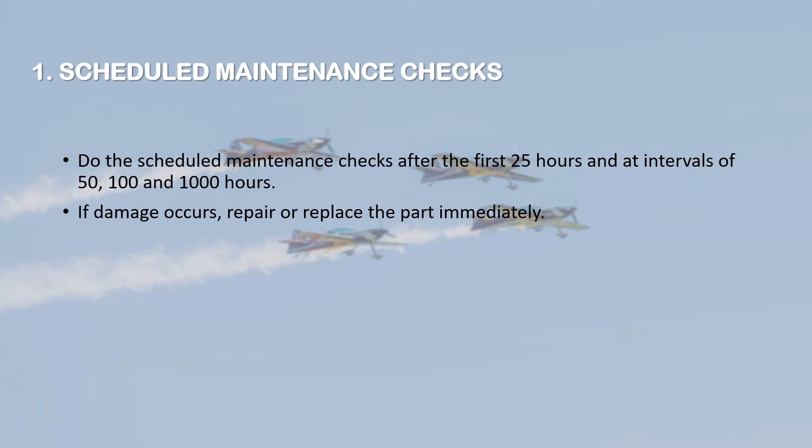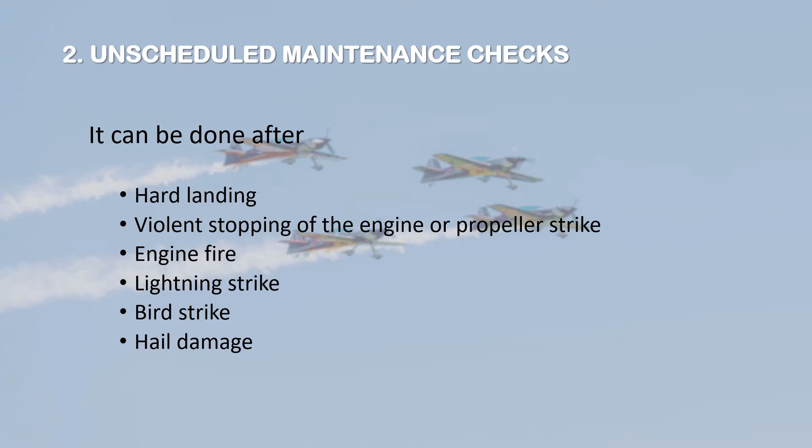For the control, operation, and maintenance of the propeller, there is the MT propeller operation and installation manual 124, which is referred to by me in giving this presentation.

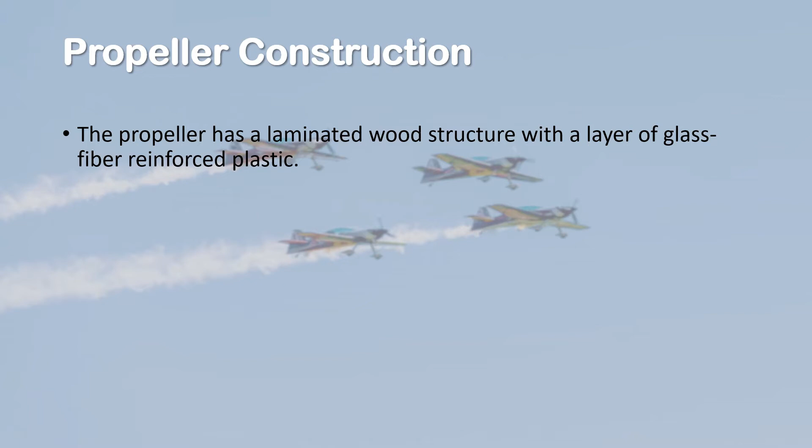Before starting with the maintenance, let's first look at the basic construction and operation of the propeller. The propeller has a laminated wood structure with a layer of glass fiber reinforced plastic. Some parts of the leading edge have metal tips to prevent erosion. Paint is applied to the propeller as protection from the environment.

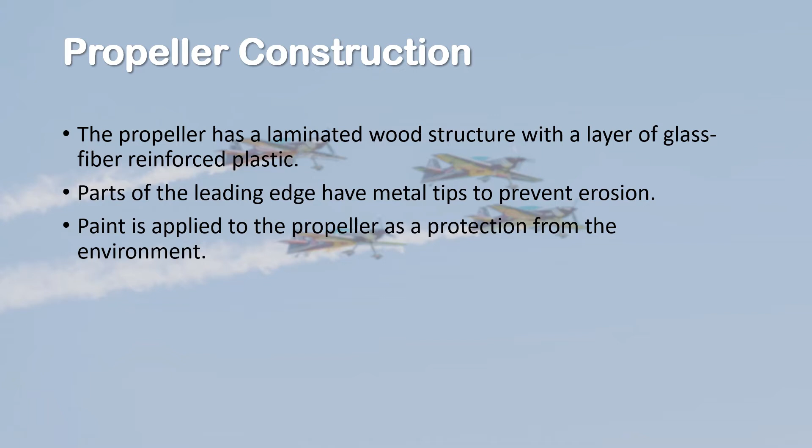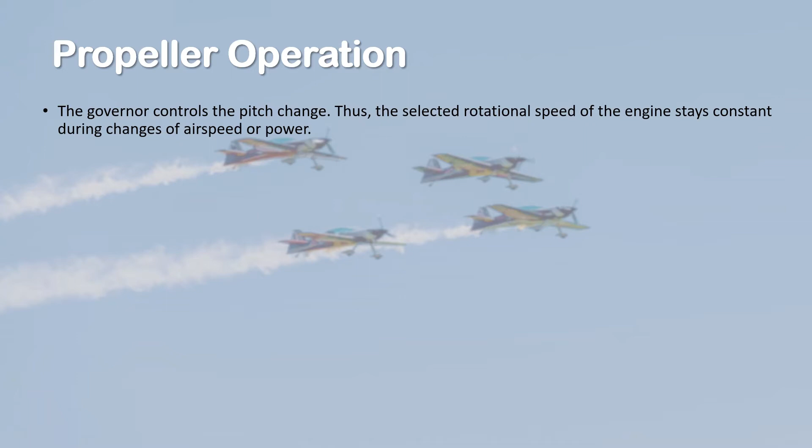Now coming onto the operation of the propeller, the governor controls the pitch change, thus the selected rotational speed of the engine stays constant during changes of airspeed or power. The governor must allow a constant speed. On takeoff, static RPM should be approximately 50 to 100 RPM lower than the max RPM, and the propeller must limit this RPM. If the governor limits this RPM, it must be readjusted.

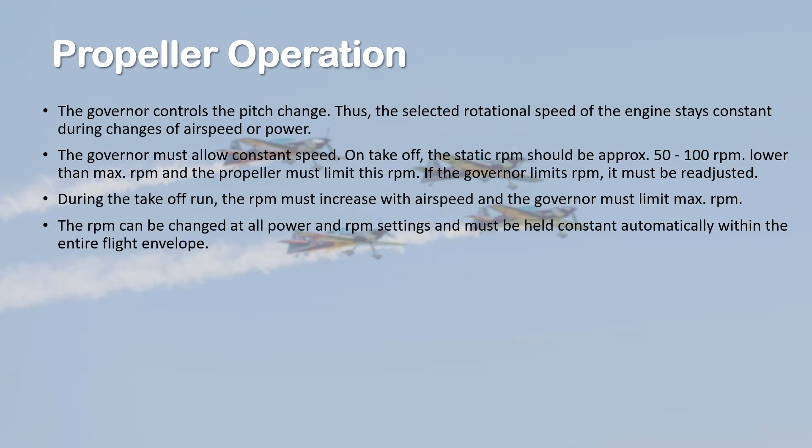During the takeoff run, the RPM must increase with airspeed and the governor must limit the max RPM. The RPM can be changed at all power settings, and RPM must be held constant automatically within the entire flight envelope. Mechanical stops are available for low and high pitch.

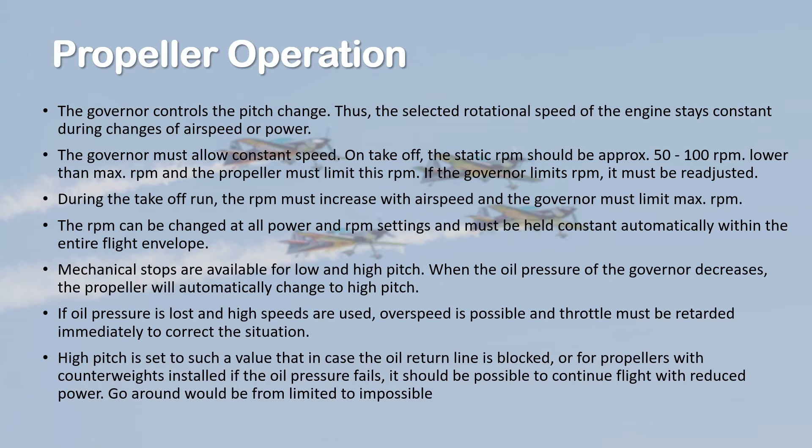When the oil pressure of the governor decreases, the propeller will automatically change to high pitch. If oil pressure is lost and high speeds are used, overspeed is possible and the throttle must be retarded immediately to correct the situation. High pitch is set to such a value that, in case the oil return line is blocked, or for a propeller with a counterweight installed if the oil pressure fails, it should be possible to continue the flight with reduced power. Go around would be limited to impossible.

Now let's start with the maintenance of the propeller. There is no special schedule made for the maintenance of the propeller, although the propeller maintenance can be done after a usual inspection. Let's first start with maintenance of the surface of the propeller.

For repair of minor damage in the blade surface and edges, automotive materials such as PU or acrylic paint and epoxy resin can be used. The blade can be cleaned with normal car cleaners and polish. It is important to avoid moisture penetrating into the wooden core.

If necessary, please consult with an aircraft inspector for final decision concerning repair. If the repair is made locally, please observe the curing time of the resin and paint system.

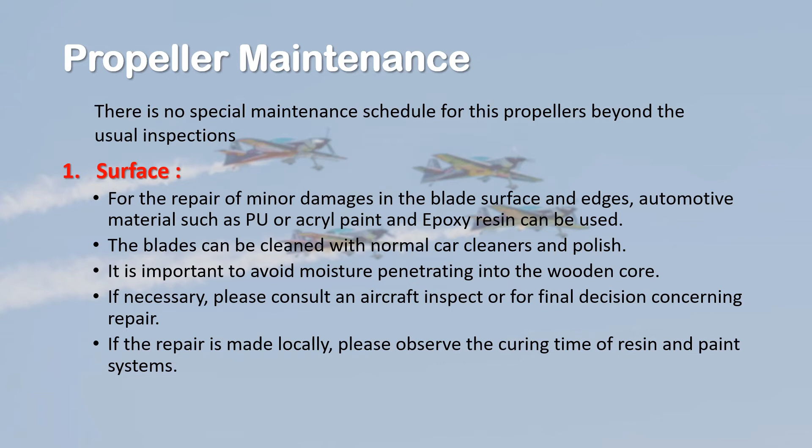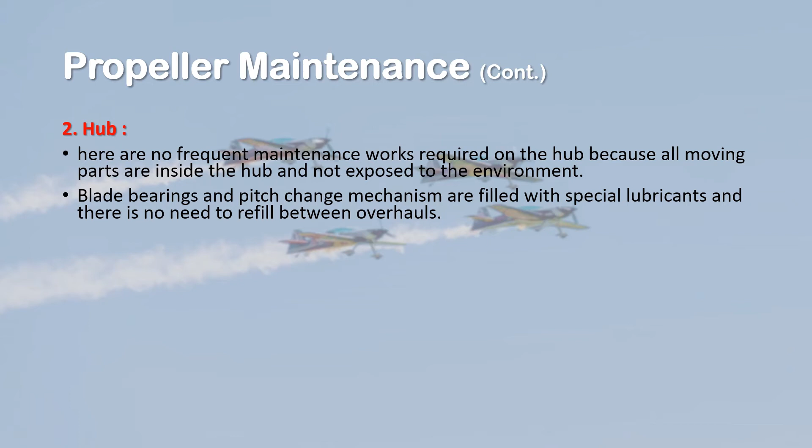For the hub, no frequent maintenance work is required because all the moving parts are inside the hub and are not exposed to the environment. The blade bearing and pitch change mechanism are filled with special lubricants, and there is no need to refill in between overhauls. Corrosion protection of the hub with thinned engine oil or anti-corrosion spray is recommended.

For the spinner, repair of a spinner part is not permissible. Cracked spinner domes or filler plates and backplates are to be replaced with airworthy parts.

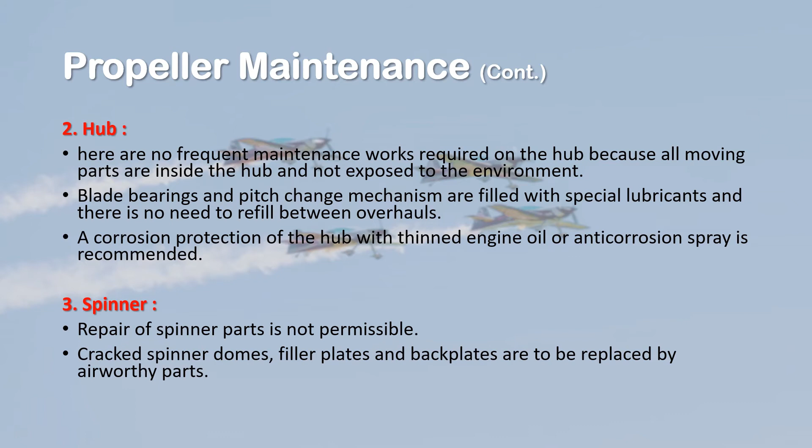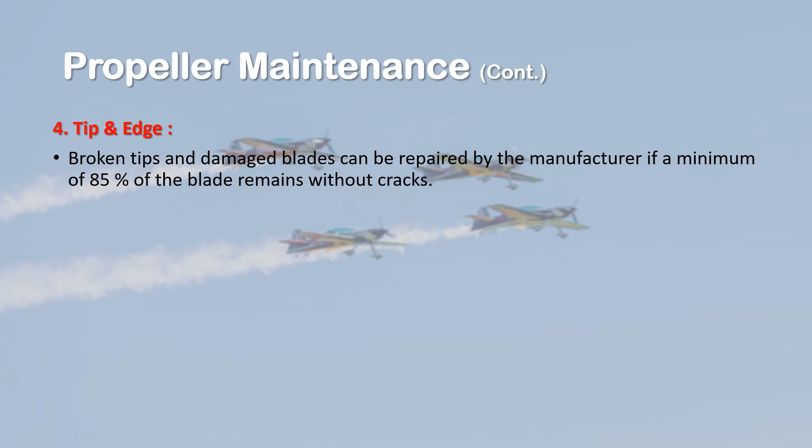For the tip and edge, broken tips and damaged blades can be repaired by the manufacturer if a minimum of 85% of blade remains without cracks. Damage of the trailing edge can be repaired because the epoxy cover can be replaced and a new erosion sheet can be installed. Blades can be replaced individually or as a set.

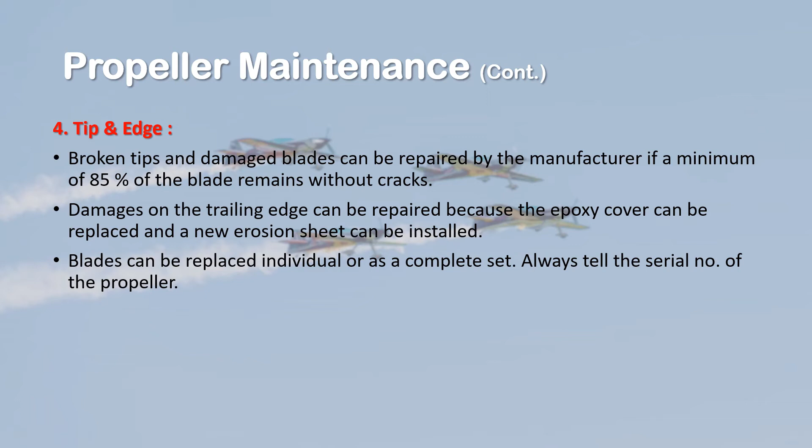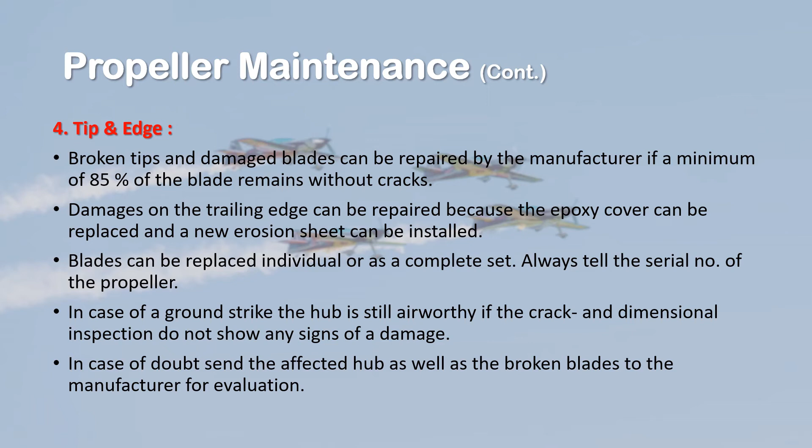With a serial number, in case of ground strike, the hub is still airworthy if the crack and dimensional inspection do not show any sign of damage. In case of doubt, send the affected hub as well as the broken blade to the manufacturer for evaluation.

For a dynamic balance, let's first look at the overview of the dynamic balance. Dynamic balance is accomplished by the accurate means of measuring the amount of load and location of the dynamic imbalance. After such undertaking, the remaining imbalance should be below 0.2 IPS.

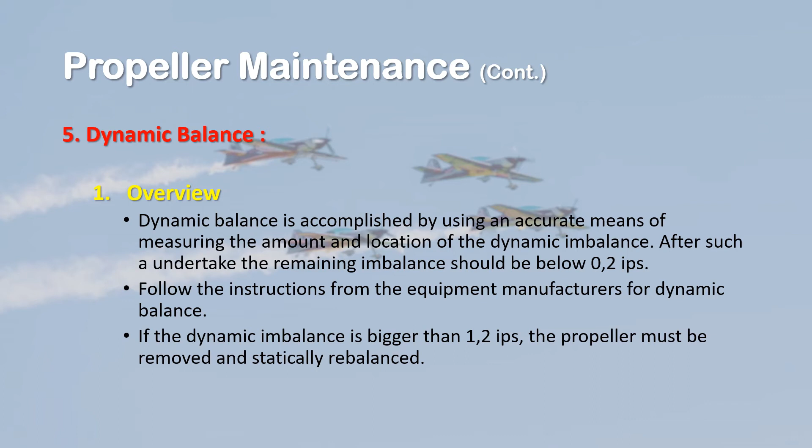Follow the instructions from the equipment manufacturer for dynamic balance. If the dynamic imbalance is bigger than 1.2 IPS, the propeller must be removed and statically rebalanced.

Now let's see the inspection procedure prior to the balancing. We usually inspect the propeller assembly after it has been reinstalled on the aircraft prior to the dynamic balancing. Prior to the dynamic balancing, record the number and location of the balance weight from the static balance.

It is recommended that placement of a balance weight on an aluminum spinner bulkhead which has not been previously drilled be placed in a radial location. The radial location should be outward of the slip ring and inward of the bend, at which point the bulkhead creates a flange to attach the spinner dome.

Drilling for use with AN3 type bolts with a self-locking nut is acceptable. Note the Chadwick-Helmuth Manual

AW9511-2, The Smooth Propeller, specifies several generic bulkhead rework procedures. All holes or ballast weight locations must be taken into consideration and must avoid any possibility of interfering with adjacent airframe, de-ice and engine components.

In case no spinner is installed, mount the imbalance weight in the mounting thread in the hub where normally the spinner bulkhead is mounted.

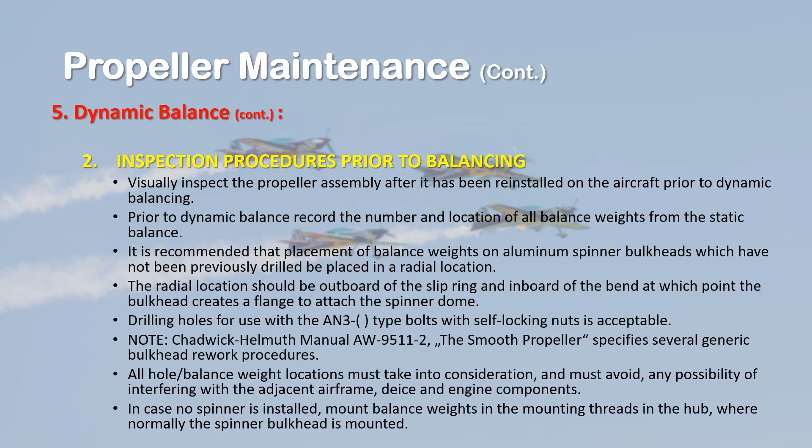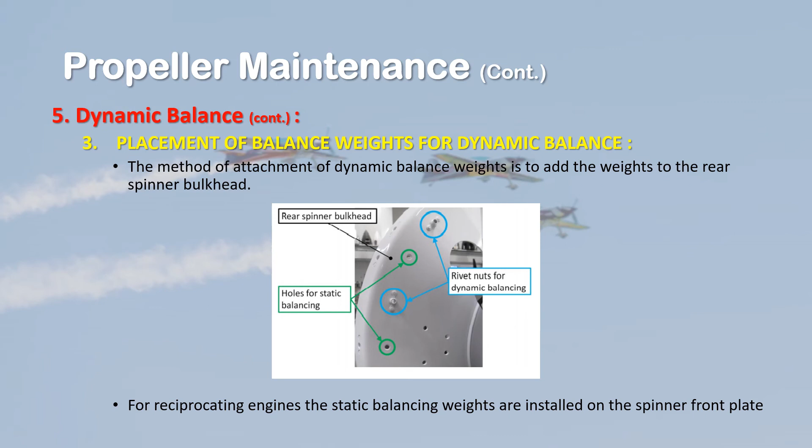Here we can see the holes for the static balancing in green color. In blue color we can see the rivet nuts for dynamic balancing. For a reciprocating engine, the static balance weights are installed on the spinner front plate.

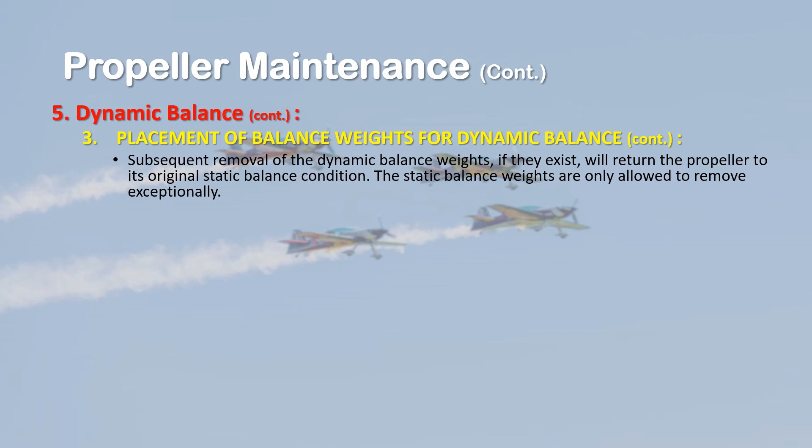Continuing with the placement of balance weights for a dynamic balance. Subsequent removal of a dynamic weight, if they exist, will return the propeller to the original static balance condition. Static balance weights are only allowed to be removed exceptionally.

Use only stainless or plated steel washers as a dynamic balance weight on the spinner bulkhead. Do not exceed the maximum weight per location of 50 grams. This is approximately equal to 8 pieces of AN970 style washers.

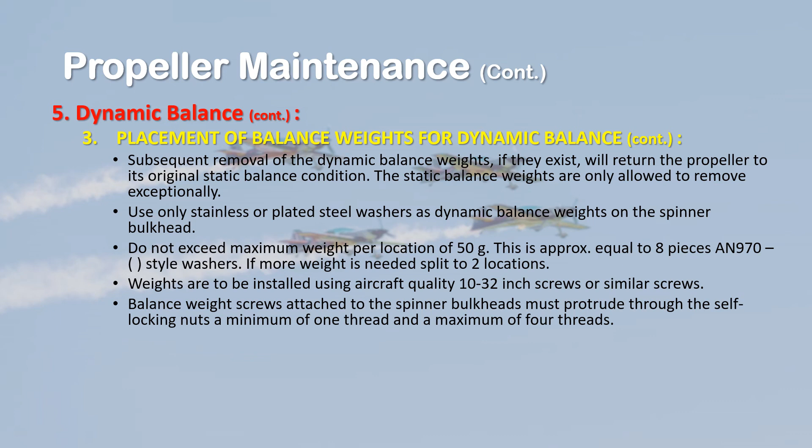If more weight is needed, split into 2 locations. Weights are to be installed using aircraft quality 10-32 inch screws or a similar screw. Balance weight screws attached to the spinner bulkhead must protrude through a self-locking nut with a minimum of 1 thread or maximum of 4 threads. A propeller which has been dynamically balanced must have a decal installed on blade 1.

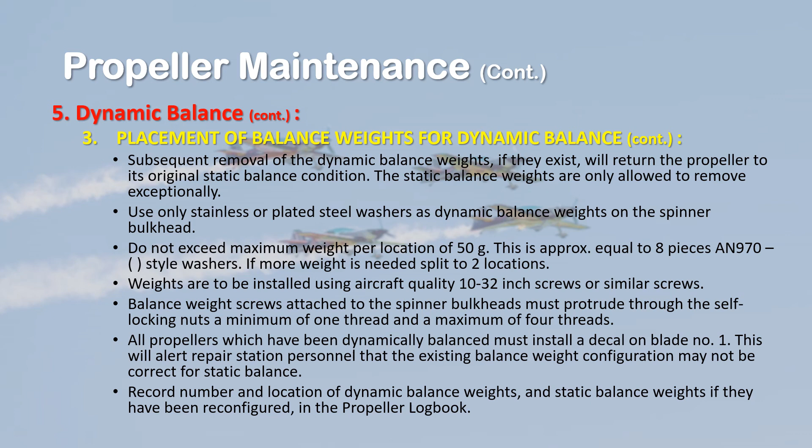This will alert the station personnel that the existing balance weight configuration may not be correct for static balance. Record the number and location of the dynamic balance weight and static balance weight, if they have been reconfigured, in the propeller logbook.